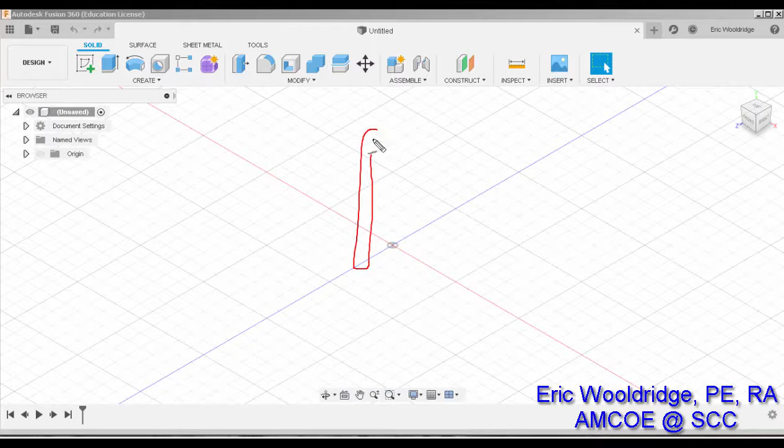Today we're going to walk through a design of something fairly simple. This actually came to us as a request to design a belt hook for a bullwhip. We've got a farmer rancher that utilizes bullwhips in terms of their cattle working, and has asked us to design something to be 3D printed to make a quick loop onto their belt. So what we're looking at is something fairly simple, something that will be pretty easy to design.

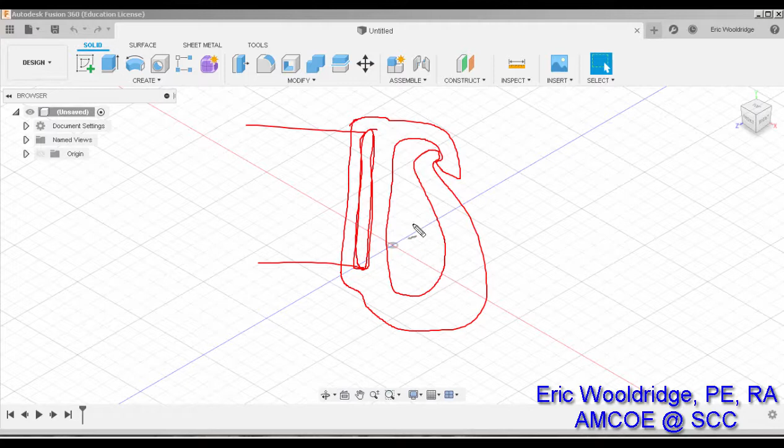Maybe have a little latch hook here and something that will come around and snap fit in, and then a little bit thicker toward the bottom, so that your belt, of course this is in section view, will loop through this, and then the whip itself in its bundles, not a very good bundle I admit, will fit in there, and then this piece will latch in some form or fashion. And we'll do a very simple version. The final one may be a little bit more complex, but at least it shows you the process.

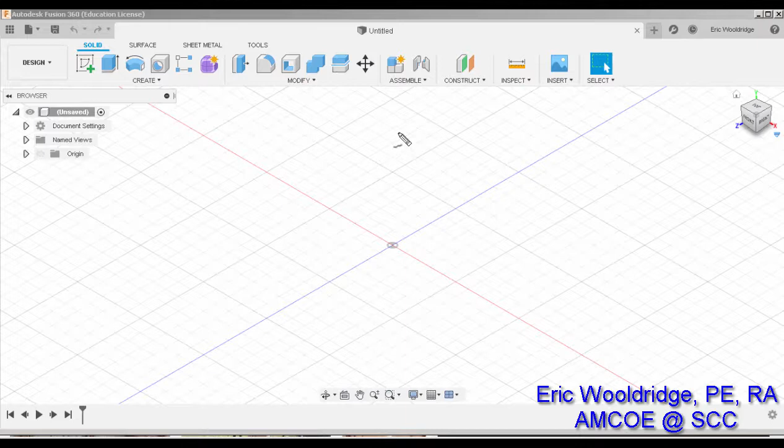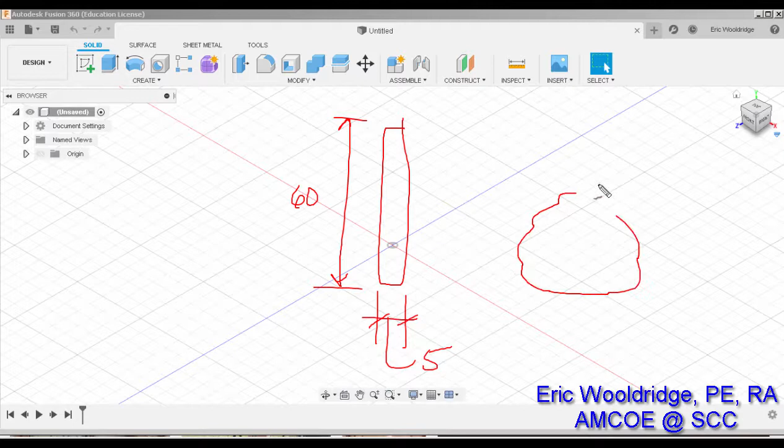All right, so let's take a look in Fusion here. Just for quick dimensioning, the opening for the belt will probably be about 5 millimeters by 50, generally that size. Maybe we'll go 60 just in case someone's got a little bit extra large belt, but we need an opening of that size. And the relative bundled size of the whips, as the strands are lapped across each other, we're going to assume is a diameter of about 30, represented by a circle. Granted, typically they'll be more elliptical in shape, or maybe more of a teardrop arrangement, but it gives us something to work with.

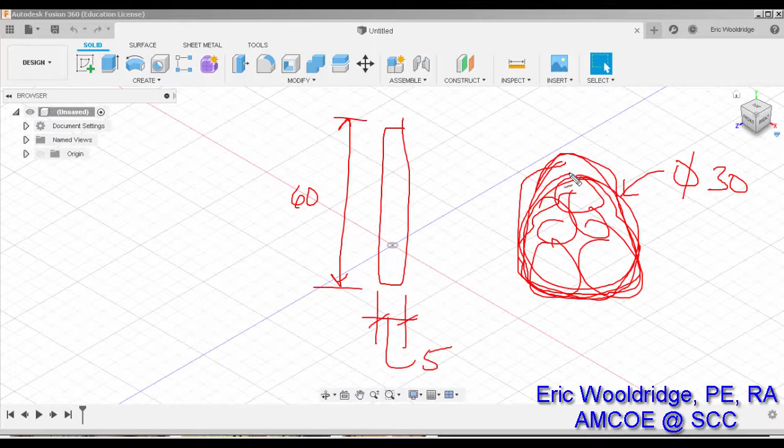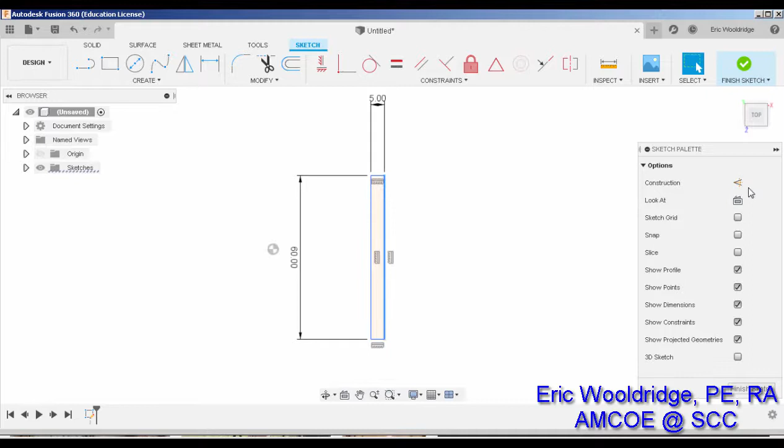Alright, so let's give it a shot. We'll assume that it's going to be 3D printed out of TPU. So the first thing I'm going to do is design the opening slot for the belt to pass through, and I'm using a 60 by 5 rectangle there, and I'm actually not going to use this. I'm just going to design from it. So I'm going to go ahead and set all of that to a construction line right here. And if you don't see your construction lines, that's the little fly out window here in Fusion.

And from that point on, I'm going to go ahead and design in the 30 diameter representation of the bundle. Come on, there we go. I'm having a hard time getting this thing to obey. There we go, sorry. So that's roughly what we're shooting for, with enough wall thickness here to handle that, and I will design around all this, maybe making some changes as we go.

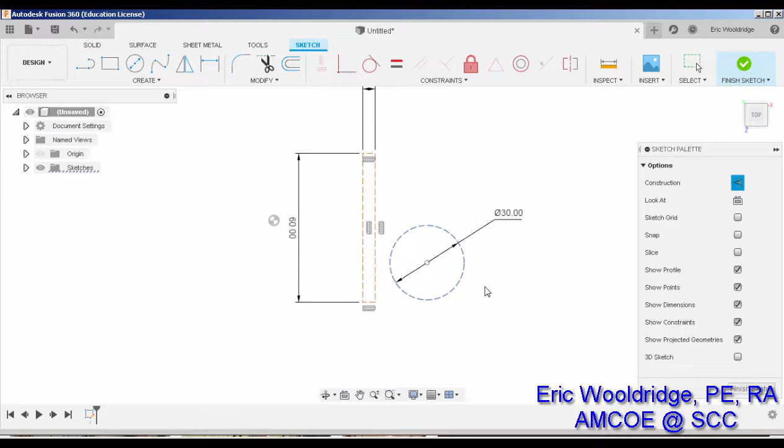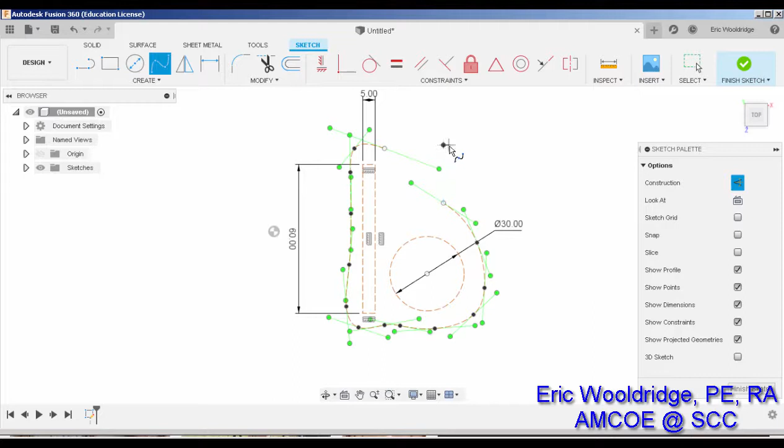Now, one of the things that I like to do is use splines more so than anything else in the creation of our work, because it gives us more ability to control things and adjust where stresses may be occurring. And so I may do that to this point and just stop. It doesn't need to be a construction line. There we go. Another thing is I'm not going to use these corners of the rectangle as my opening slot, because whenever you have sharp corners in just about any type of design that's under stress, sharp corners are bad, and they make stress concentrate itself in those corners.

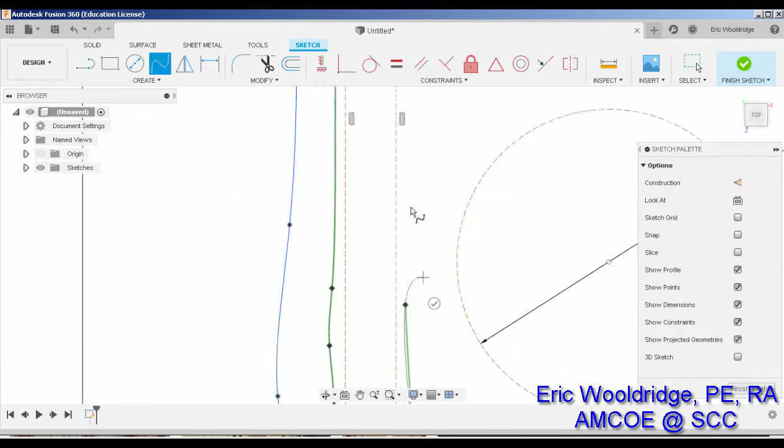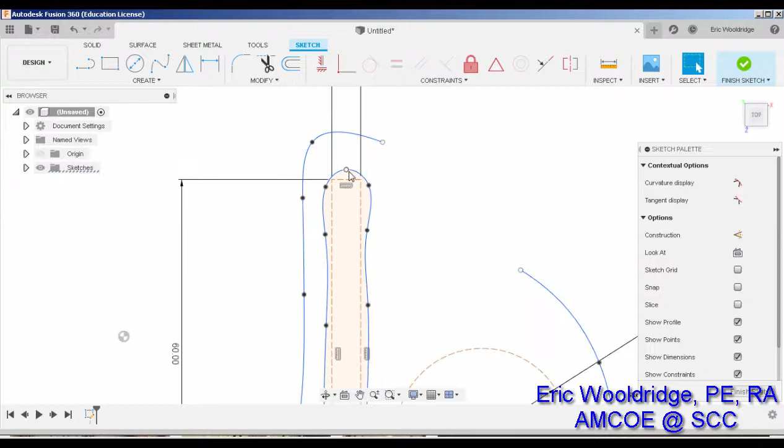So we don't really want that, so I'm going to do a spline here to round around the representation of my opening. This will give me the ability to really smooth out those corners and do something that I can adjust with thickness and avoid sharp corners as much as possible in my design. And I might even decide to tighten it up a little bit around the walls to get a little friction against the belt so it doesn't want to slide along.

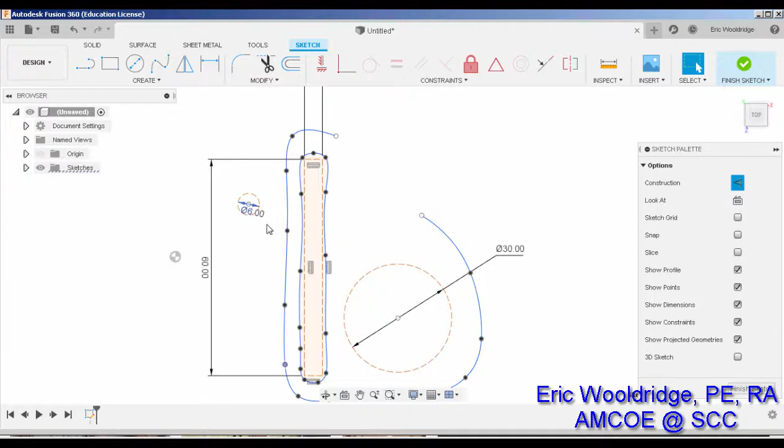Okay, so we've got that, and we know roughly how much thickness we need there. I can thin this up a little bit. And sometimes it never hurts to draw a circle in your space and set it to maybe a diameter of 6 to give yourself a sense of size while you're creating. So that way when I look at this circle, I know that this is roughly in the 4 to 5, 6 zone, and I can choose to pull it out a little bit more to give me a little more wall strength. And I can always drag it in and look at it and then pull it back out to see if I'm getting a little bit too tight on certain corners.

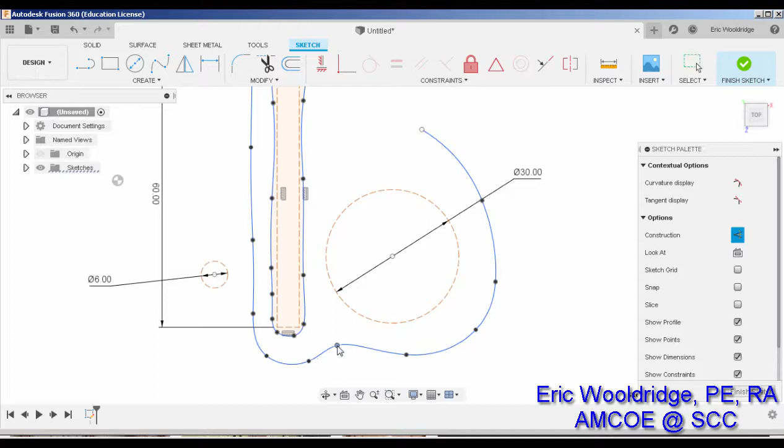And I often suggest that designers get a feel for using the 6 diameter circle so that you don't oversize or undersize. Don't always make it all about dimensions. Make it about the size that you're after. Okay. If you want to, pause the video now and get to where I am at this point, and we can continue on.

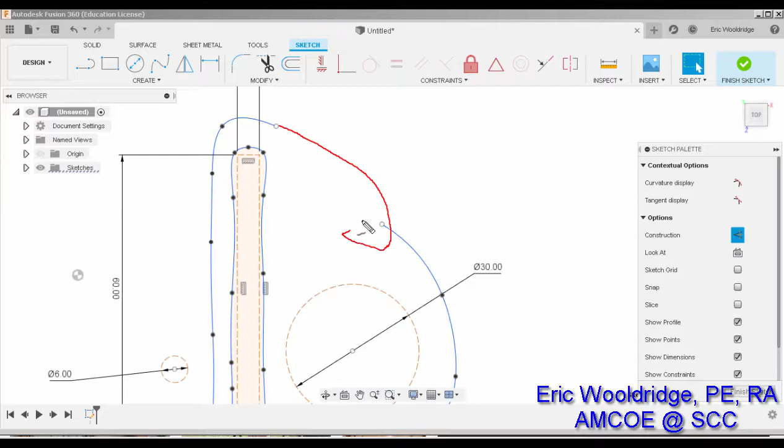Okay, so let's get going with the rest of it. My objective now is to figure out how I'm going to create a sort of snap fit feature. I want it to hook this way and to come down, of course, and I want this piece to come up and hook inside it. And the pressure of the whip inside the harness here will put pressure against this point. That way I can't slide it out when using it. So that's our overall goal here.

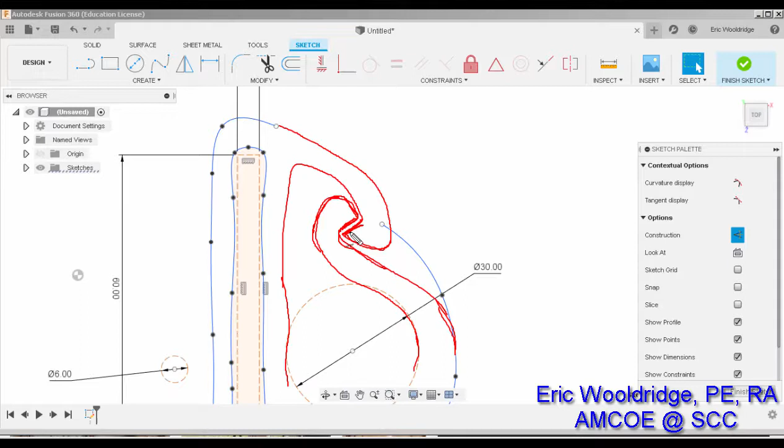And we're going to assume that this whole thing is going to be printed in one shot, one direction, where we would be looking down on it from the perspective of the build plate. So it's all coming at us, and that will keep us from having to worry about overhangs and support material. So I'll probably want to design down that way and maybe create a shape kind of like that. I might want to have some straight lines here because that may work really well with a good tight snap fit, or kind of a sliding connection point there. Not truly a snap fit, but you get the idea.

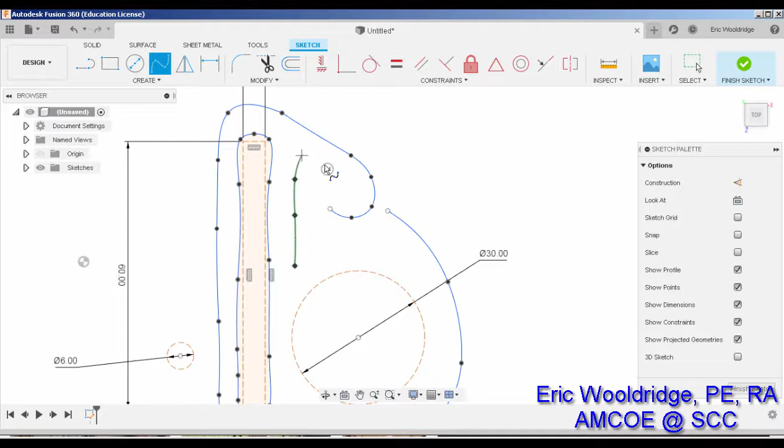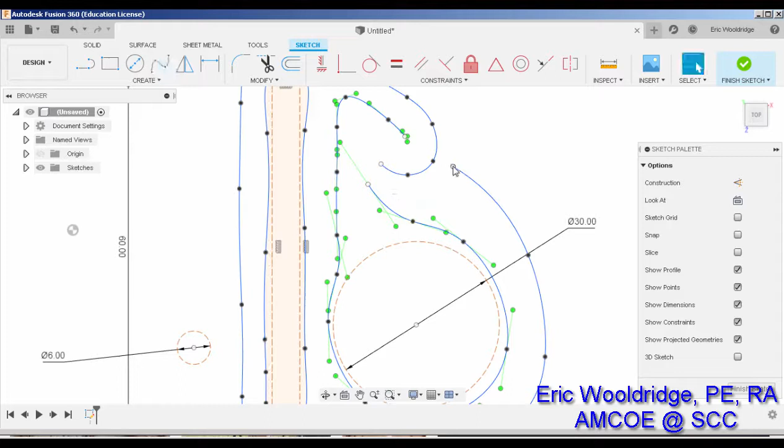So what if I go ahead and come out and sort of wrap this around this way, and just stop. And then I can go back and turn my construction lines off for sure. And then I can turn around and come in through here. Maybe get to about right there, stop that. Maybe continue on from this point and just kind of wrap it. It doesn't have to be perfectly on that circle. Again, we want the ability to have some maneuvering with our work. And as you can see, I'm going to have to do some maneuvering here to pull that back in place. Maybe pull this out a little bit higher.

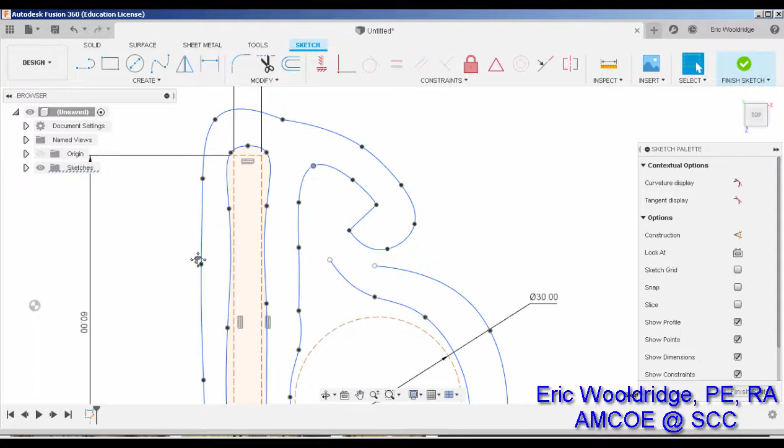This may be something that I change over time, but at least it allows me to draw a line from here to here. Pull this up a little bit. Again, kind of glancing over at my 6 diameter circle so that I have a feel of size in terms of getting too small or too large. And I may choose to go ahead and just make the rest of it a regular line. Come in real close. And maybe I'll just connect there. And then spline the rest of the way around. Nice.

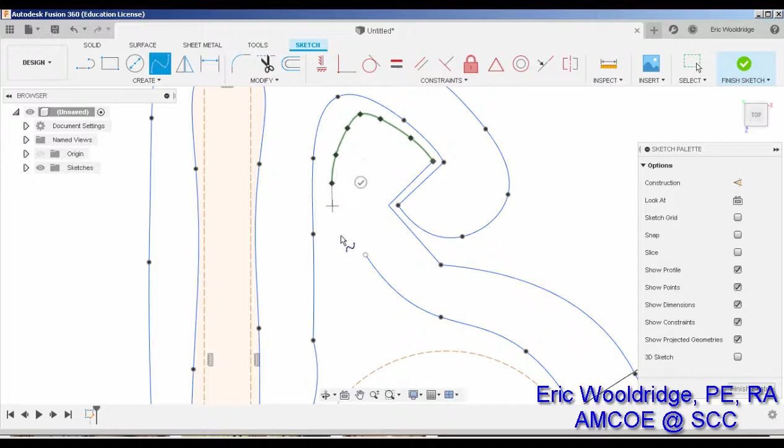Smooth fit there. And I can even pull it up and get it as a tighter fit at this point. Again, hoping that the pressure of the whip itself will create the good tight fit that I need here. And if it doesn't, that's not a problem, because I can always tie this in a little bit tighter there and a little bit there. You'll notice that I'm doing what I said don't do, and that's making a sharp point there, so I'll probably need to fix that with a fillet. And maybe a little bit more there.

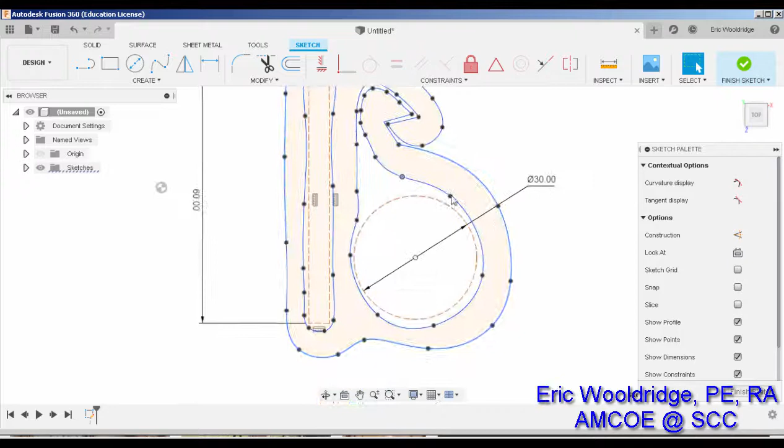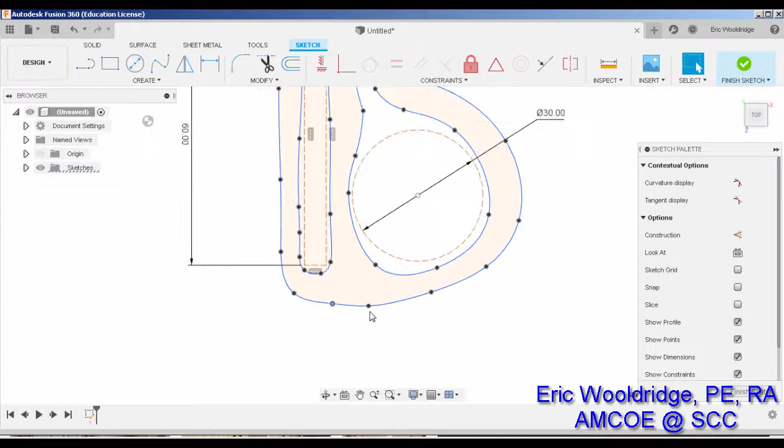And this, of course, is only going to be one possible way of doing this. And maybe I want to tighten up this just a bit too. We'll see. Now I know that this is going to be a tight stress point because of the way it's going to be bent, so I'll kind of pull that in, maybe pull this out a little bit, and give it a little bit more strength, more material in this zone. Pull this back some, maybe flare that down a little bit more. And again, we'll probably use TPU to make this.

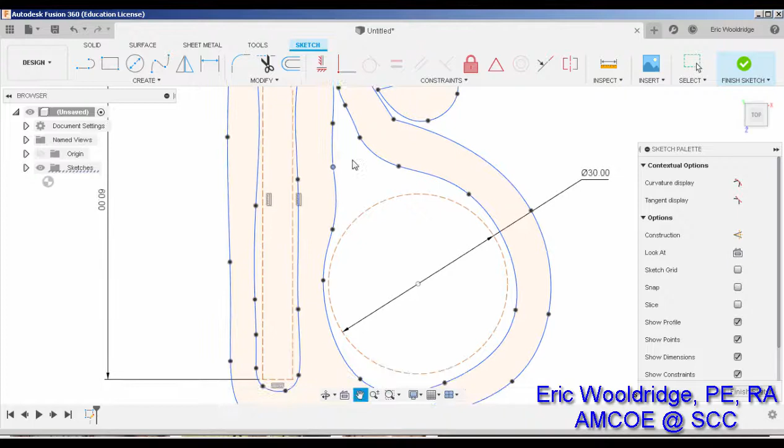So, kind of shaped it a little bit. Got my 6-unit circle to kind of zoom around through here and see how we're doing on thickness. Doing pretty good. Don't really necessarily need a lot of thickness along that wall. And I can probably pull this in a little bit tighter.

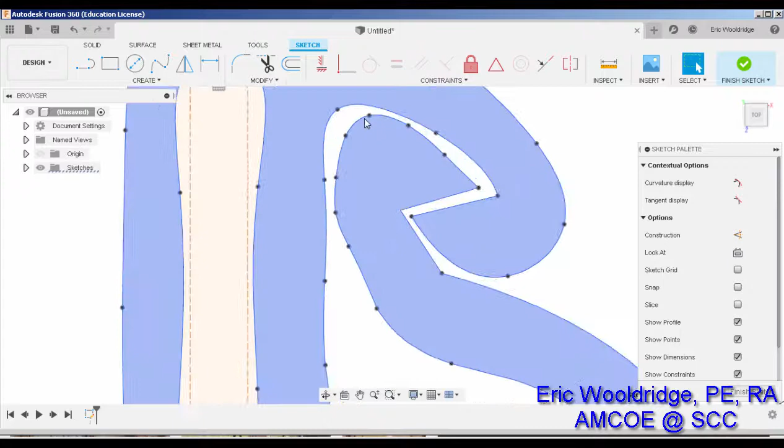And that's the best part about these sketches, is you can always turn around and come back and adjust them as you do a quick test to see how it's going to fit. And who's to say you might not be able to do this in something other than TPU? You might be able to use this in NinjaFlex, or maybe even PLA, maybe ABS. You might be able to get just enough movement out of what you need to make this happen.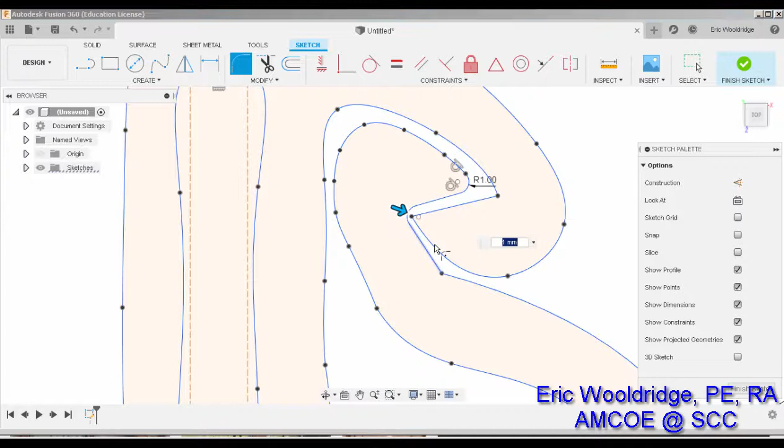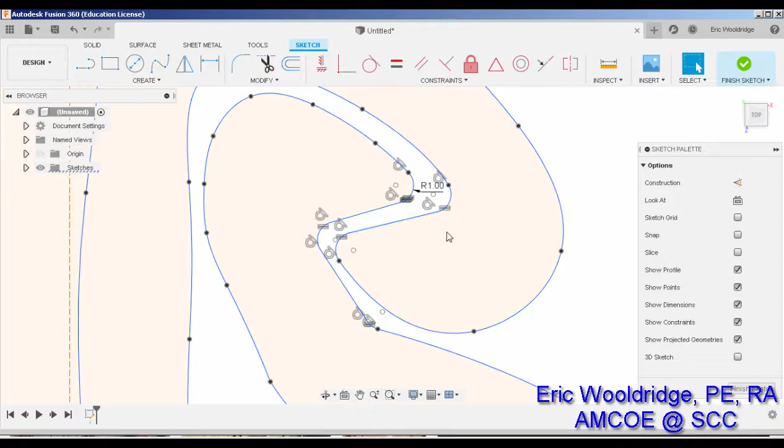Now, again, I'm going to avoid my sharp corners as much as possible by turning around and using a fillet, clicking on this point, and that's a little bit too large. And then I'll click on that one, and then, if I can get in close, click on this one, and maybe this one too. See how it does that one. Doesn't really like that one that much, but it'll work. And then maybe this one. And so I've kept those from being too sharp. Definitely want to avoid sharpness whenever we can.

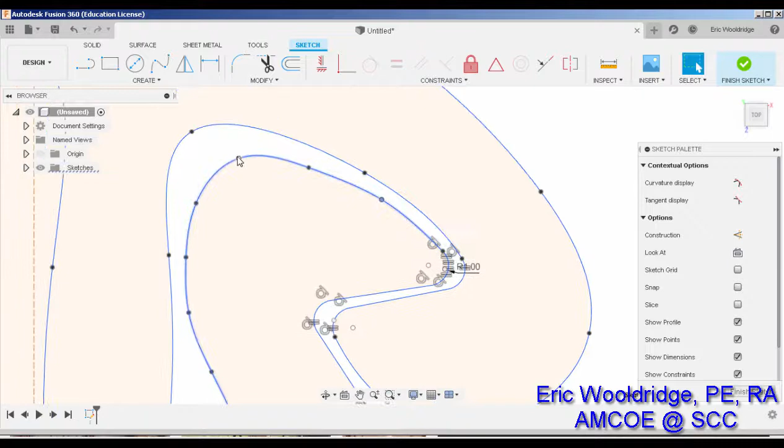And I can still pull this in a little bit more to make a tighter, kind of overlapping fit. Now we do want to be careful, of course, in production. Whoa, don't want to do that, apparently. We don't want this thing to actually bond to the other surface when it's actually in production. So I may want to pull it back out. I do want a tight fit, but not so tight that it actually touches the other walls in production and then makes it hard to get out. So a little bit there to protect that sharp corner.

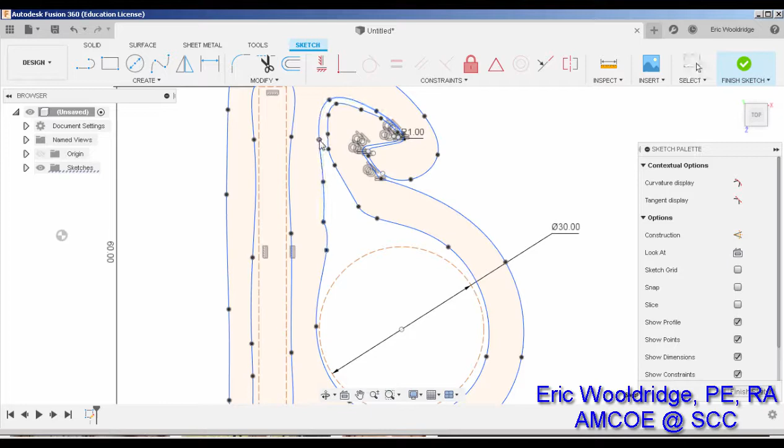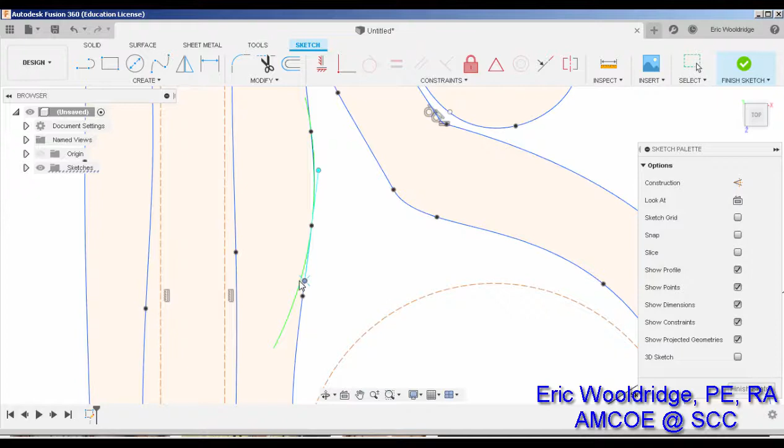And this will sort of put a squeeze on the overall top part of the clip structure, which might be good for us. I may be a little overzealous right there, so we'll take that out and maybe pull in just a bit more right here. Always kind of back and forth. And see this? I don't want that. I don't want those pockets to create that way. You can click on them and actually just adjust the curvature so that it's not too sharp, about right there. So you don't get a tiny little pocket.

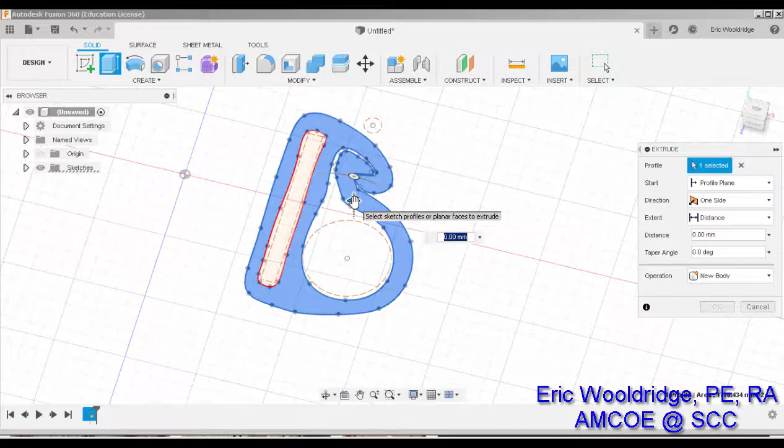Okay. So at this point in time, I've got a potential design in mind, a concept to work with. I hit finish sketch, and I'm going to extrude my object. Click on extrude, and it's always good to have a ruler on your desk to give you a sense of size. I can imagine this thing being about 25. We can start there at 25 units in thickness, and there we go.

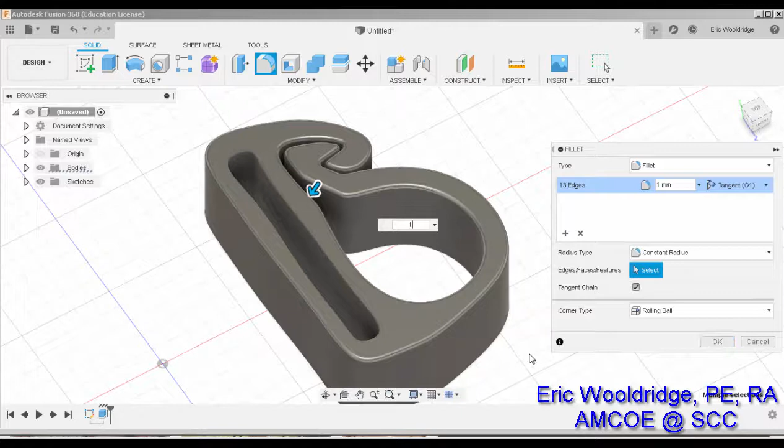Now, if you want to smooth it out even more, you could use a quick fillet and try a chain selection depending on the number of points you have, and see if it will let you do a quick little radius. Yes, it will. Kind of round those tops off. That's always nice. And then I can add on another one down below and select that one, and that one, and that one, and of course the outside there. Also set it to 1. Smoothing that out, and then one more here by clicking on this one, radius 1. And so now no real sharp corners.

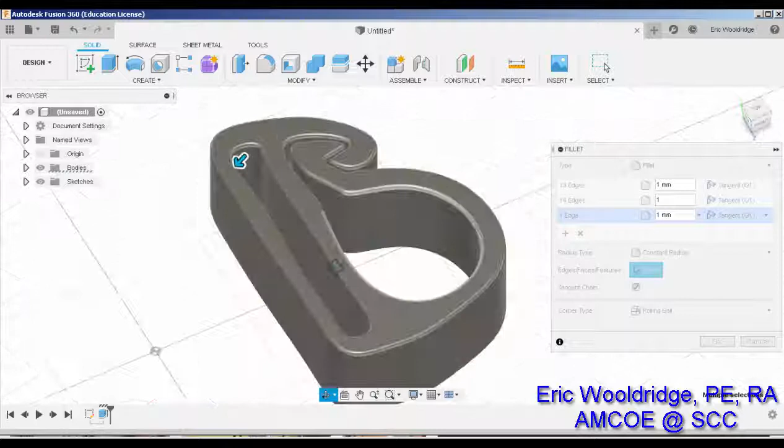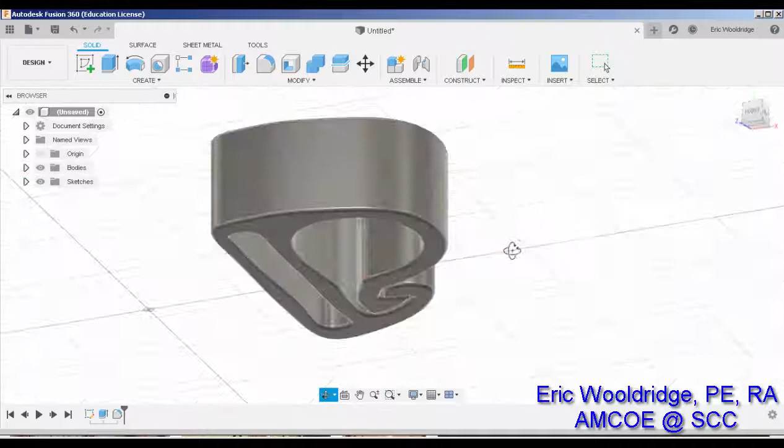It could slide right down the belt, maybe a little bit too thin here, we'll see. But a good chunk of the weight is going to rest probably at that point, and then we will see how this would hold up in terms of bending. But there's the creation, and what we would do is probably set it up for printing on a typical FDM system, or maybe SLA if you want a little bit higher precision with some flexible material to see how it would work out.

Alright, so give it a shot yourself. You can finish it up there. You can print it off yourself, see how it works. Go out and buy a whip if you want to, see how it works with your design, and it can be useful for a bunch of other different designs.

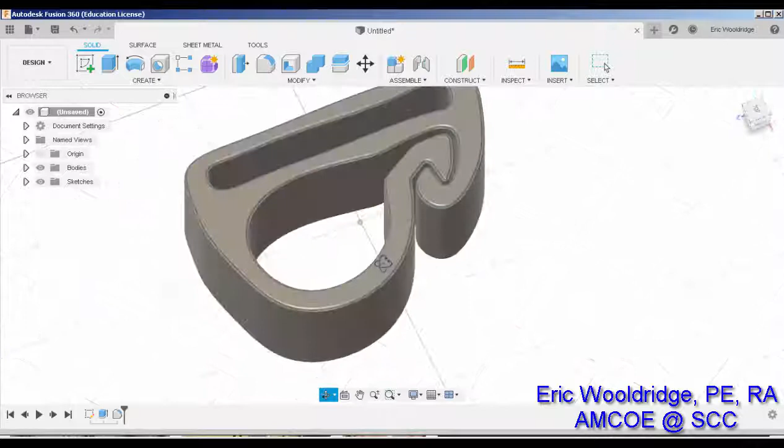Now in theory, one will be able to pry this edge. I may consider trying to make it thinner to where it slides apart, or maybe creating a little edge right here to pry this out, depending on how it works together. So that's part of the process, figuring out how to manipulate it when it's actually in there under pressure, and how you're going to get these locking points to unlock, so to speak.